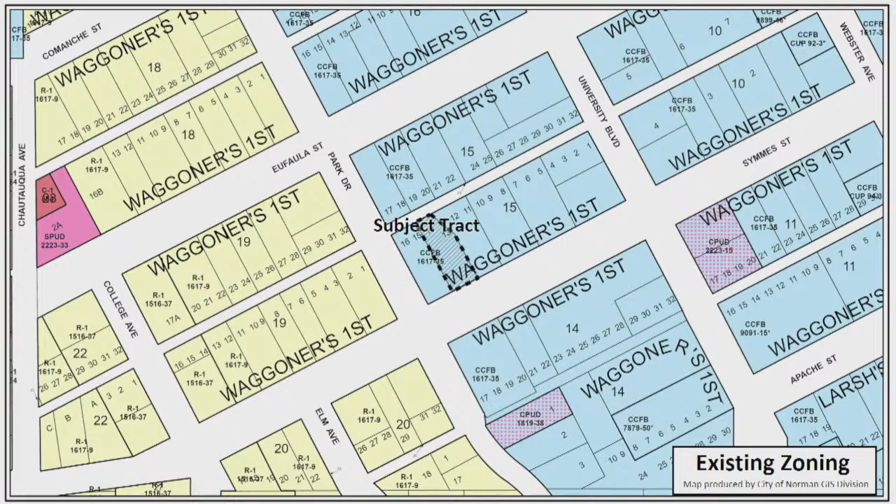And they're able to meet most of the requirements, except they will be extending a set of metal stairs on the east side of the building into the setback, and the finished floor elevation will be at grade. This is the existing zoning, which is Center City, and this is the existing land use, which you can see is surrounded by residential dwelling units. And here's an aerial of the property.

I would add that the proposal also will have the new building sitting at the 25-foot required build line as required in the CCFBC detached frontage.

The applicant was not required to have a pre-development meeting, but did choose to have one in order to allow the residents to find out about the redevelopment. There were 2 residents that came to the meeting. They had questions about bedroom quantities and dwelling unit quantities and the design of the structure, which the staff from Krittenbrink Architecture answered, and they had no further concerns.

The impact, let me show you. Here's the view of the existing structure. It is an existing triplex right now. And then here's looking to the east, down Symmes. And then here's looking towards the west, down Symmes. And then this is to the south, another residential dwelling. And here is the alleyway looking west and alleyway looking east.

As far as impacts, the previous rezoning requests for this vicinity have sought to maintain the residential single-family character of the neighborhood. In 2016, the residents of the neighborhood successfully petitioned to downzone from R2 to R1, and then in 2017, when the CCFBC was adopted, it was designated as detached frontage, which allows for either a single-family dwelling or a single-family dwelling with an accessory unit.

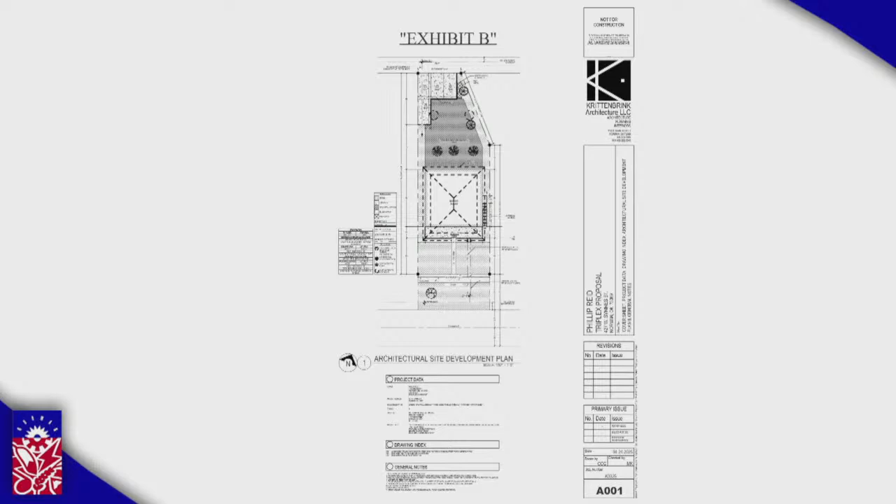I did ask because you went here on the back, and I will go through it now. I guess you can see what we have going on. So I press for... yeah, that one. It's never obvious. Okay, we went too far. Yeah, you went. Here we go. Okay, oh, so that's not my presentation then, is it? Well, oh yeah, keep going. Sorry, there you go. There we go.

So you can see right here, on the right is the 2-bedroom unit. It's fairly open plan, 2 bedrooms, 2 bathrooms. That rectangular area in the back is a common stair, used to get up to the upstairs. And then on the left-hand side, you see the 2 one-bedroom units. Again, there's that stair area. They have their own bathroom, own kitchen, washer and dryer and whatnot. And they enter from the front on Symmes for this property.

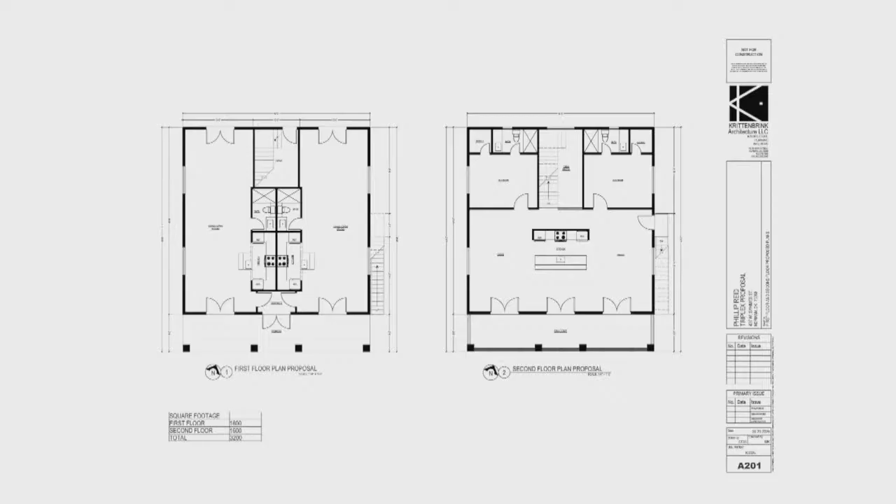However, the entry to get up on the back, we'll have 4 parking spaces along the back off the alley. You can see on the back there's an entry. This prompted a change from the owner, because if they're going to tailgate here, it's a great location. You see there's a porch on both sides - we're trying to create this very residential vibe. If we're down in front having a tailgate, we'd have to go all the way back around. So at the last minute we added an open steel stair, which code allows if we have a city official approve it. We ran it through Jeff, and he was okay with it.

That is the elevation. It'll be 2-story, again, with the front porch across the bottom. You have the unit on either side. The common entry in the front is in the middle, and then you see the second floor there. Tall ceilings, I think it'll be really nice - it kind of has a Tara meets Bourbon Street vibe to it. So I think it's a really nice unit. I think it'll be great. I live right across the alley from this, so this would be a welcome change for us and for the neighborhood. And I think that's it.

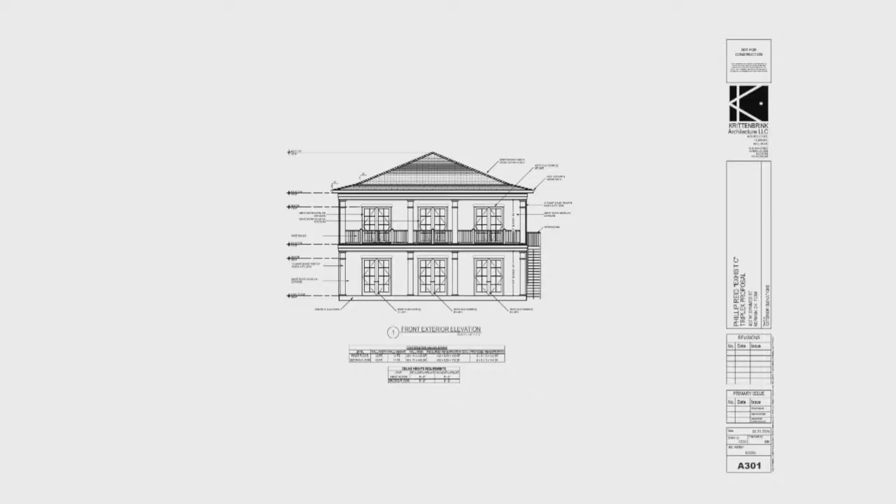I'd be happy to answer any questions.

Thank you. Any questions by commission for the applicant? All right, seeing none, are there any audience comments? Any planning commission discussion? Thank you.

Okay, if there's no other discussion, I would take a motion on this item. I'll move to approve. I'll second. And a vote. You may vote. All votes have been cast and it carries.

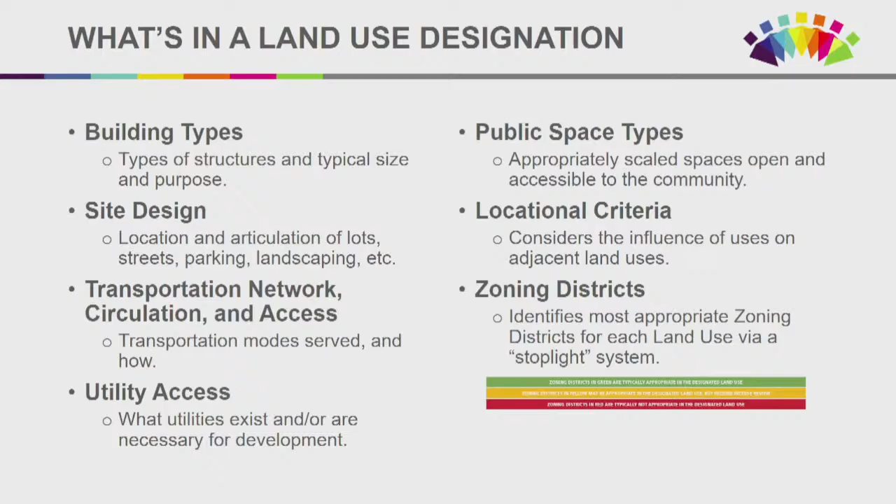When you look at each of the land use designations, one thing that's really important, especially for you as planning commission members, is understanding what each land use means. So there should be a page to 2-page spread on each one describing building types, site design considerations, transportation network and circulation access considerations, utility access, public space types, location, and even the potential zoning we have in place today. We hope that's a good tool for you to better understand what a land use means, like urban low versus urban medium, and so forth.

I want to take a minute to talk about the reserve area. The intent here is really preserving and protecting the area from harmful development, conserving existing portions of land for future urban densities. Within these areas, acreage subdivisions would compromise the feasibility of future urban services, so we're trying to keep this area in almost a static state. It is a bit different from the 2025 reserve—the boundary isn't exactly the same—but the urban reserve describes how development should be designed if anything would occur in that area. But again, we're trying to keep that from happening.

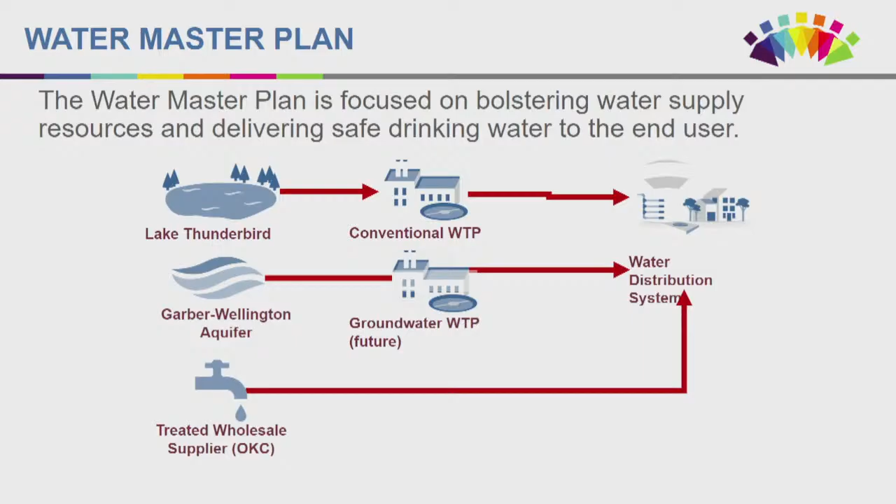The second bucket is the water distribution system—taking those supplies and delivering them through a series of pipelines, water towers, and infrastructure of that nature to deliver that product to the end user.

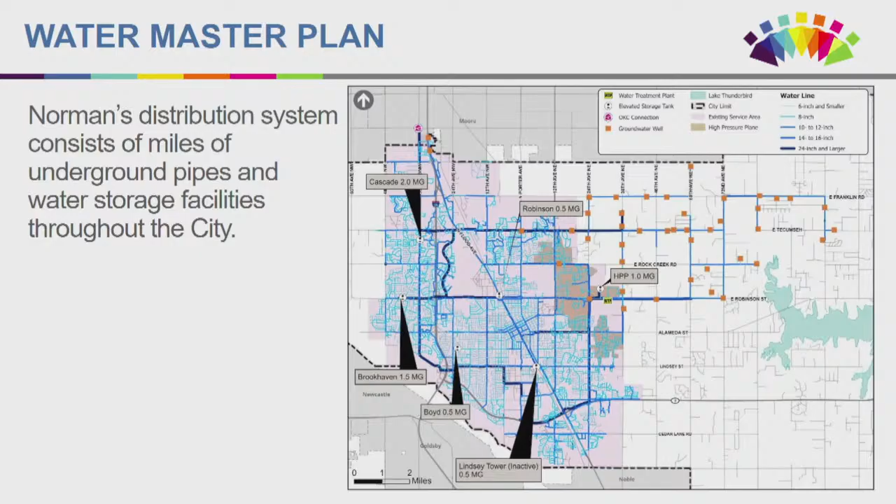Your Norman distribution system today consists of miles of underground pipes and water storage facilities throughout the city. So showing you a literal 30,000-foot view of what this looks like for our city, you can see the blue lines representing all the different distribution lines we have in the system, our water storage tanks throughout the system, and the orange dots representing our well field in the northern and northeastern portions of Norman.

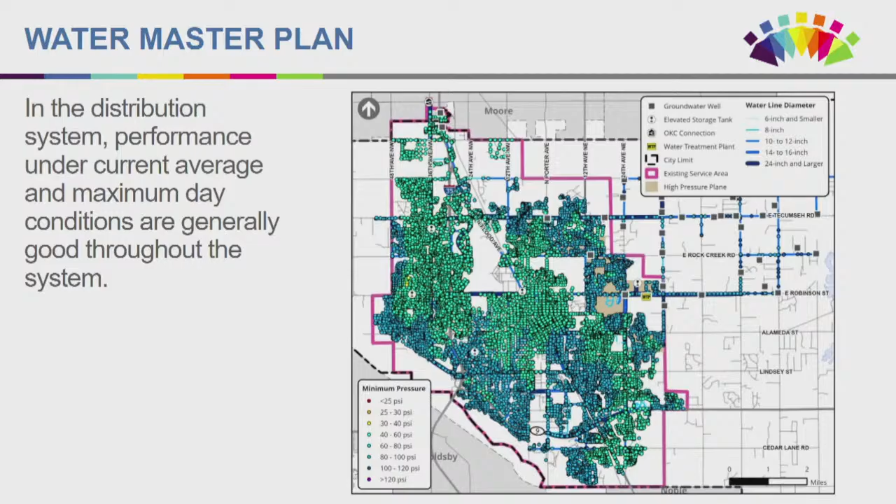In this graph, we don't want to see yellow or red nodes, and you can see here today under current conditions we have very limited instances of that throughout Norman. So a big focus of our plan is maintaining that performance over the next 20 years as we add demands and as we add growth throughout the system.

We go through a water demand procedure, and those water demands are projected to increase proportionally with our service population. Showing you a water demand curve on the screen, we have years across the horizontal axis, demand in million gallons per day on the left vertical axis, and our corresponding service population on the right-hand axis. The general trend historically in Norman has been relatively linear, and we're projecting a similar increase over our 20-year planning horizon, ending in 2045 with an average water day demand around 23 million gallons per day.

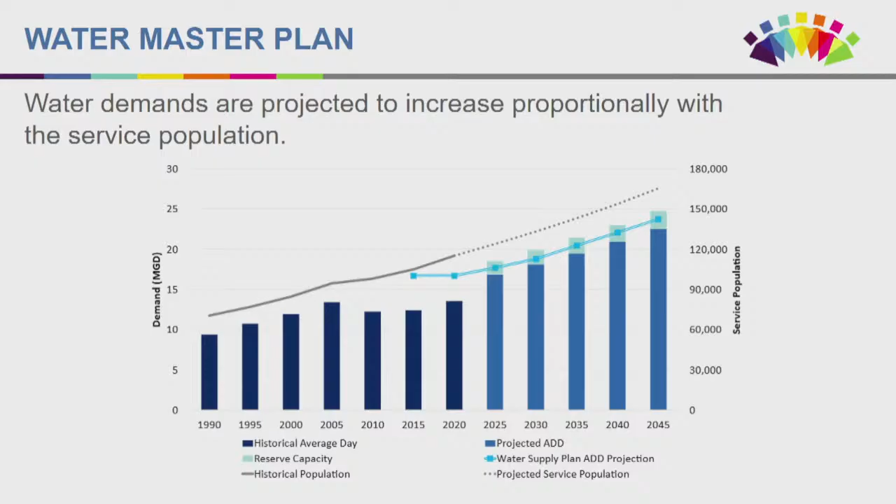Lake Thunderbird is currently the largest source of supply, currently supplying about 70% of our water demands throughout the system. Groundwater follows at about a quarter, 24% or so, with the wholesale OKC connection balancing the remaining 7%.

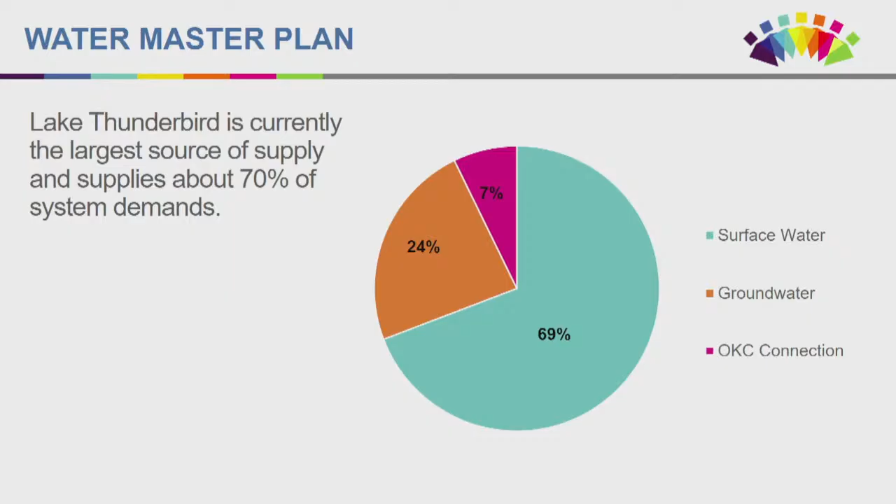This fluctuates from time to time as demands increase and decrease throughout the system, but on average, this is generally the split we have in our water supply portfolio.

Filling that gap was a big part of this master plan. We went through a robust alternatives evaluation, screened out many different alternatives that could potentially supply this water, and then developed 20-year life cycle costs for our shortlisted alternatives, which were deemed more feasible than the wholesale list of items we looked at.

Out of this exercise, those three alternatives shake out as the most cost effective over the next 20 years. When we put that together into a water supply portfolio in 20 years, you can see how that same pie chart we looked at a few moments ago changes over the next 20 years. We're looking to really expand our finished water purchase from the city of Oklahoma City, increasing those purchase volumes and potentially adding a second connection with OKC, continuing to add those Garber Wellington wells, growing that percentage of the pie chart from roughly 24% to 32%.

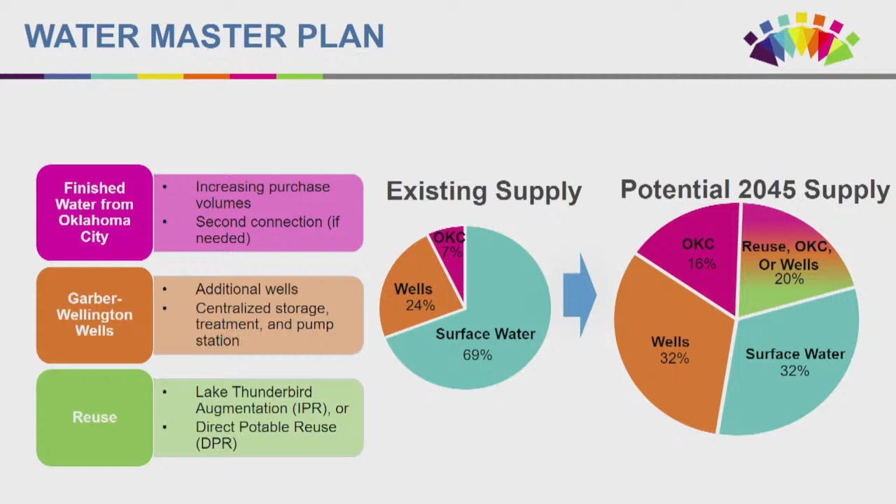Filling the balance with that potable reuse portion, IPR, Lake Thunderbird augmentation, our plan also discusses the potential for pivoting to direct potable reuse if necessary. That's a discussion in the report, with some considerations laid out, and it's allowed for in this plan if that becomes more feasible in the future.

When we put this all together in a 20-year CIP, or capital improvement plan, we're showing a map here with roughly 12 to 13 different key projects that come out of that CIP. These are focused on three primary areas.

One, bolstering our existing water service area, upsizing and maintaining it to meet those performance criteria we talked about. Then, in green, growing our infrastructure to serve future water service area improvements. And finally, the blue being the supply improvements, bolstering those water supplies that we then feed into the distribution system.

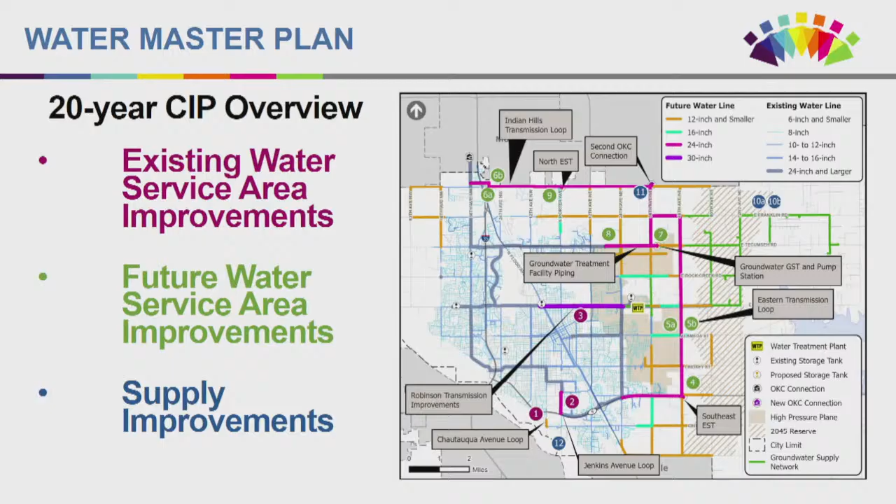And with that, I think I'm good to roll right into wastewater.

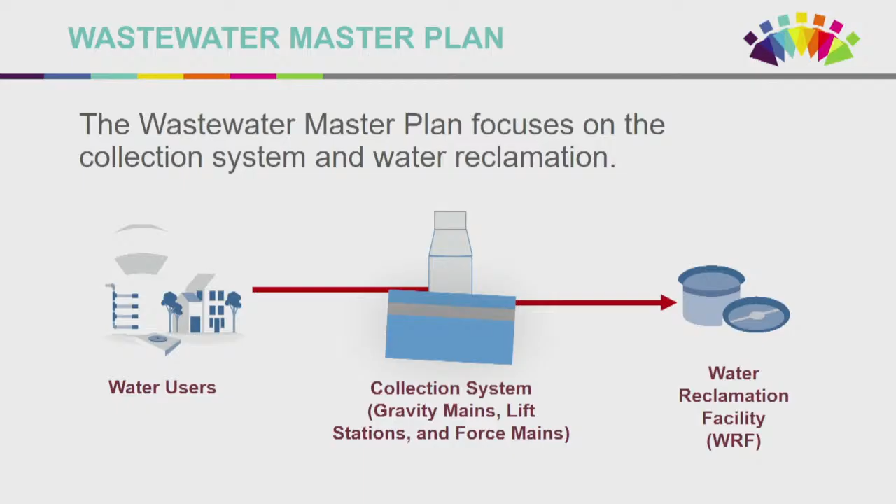So very similarly, kind of flip side of the coin here, our wastewater master plan focuses on two similar buckets: the collection system and water reclamation. The collection system being the pipelines, manholes, lift stations that collect wastewater and convey it to a single common location, where we reclaim that wastewater and treat it at the water reclamation facility before it's discharged back to the environment or reused for other beneficial uses.

Giving you a snapshot here of Norman's wastewater system, that collection system is miles and miles of gravity pipelines, force mains, and lift stations that all convey to a single water reclamation facility on the south side of town. You can see there in the purple triangle on the southern end of town off of Jenkins.

You'll hear about drainage a bit more later tonight, but as some of you may be aware, there's a general watershed boundary running through the center of Norman, shown in that blue line. Generally speaking, everything on the south side of that line drains to the Canadian River. Everything on the north side generally drains to Little River, Rock Creek, etc., eventually to Lake Thunderbird. That's a big part of our evaluation: optimizing those sewer sheds, conveying that flow cost-effectively to those common locations for water reclamation.

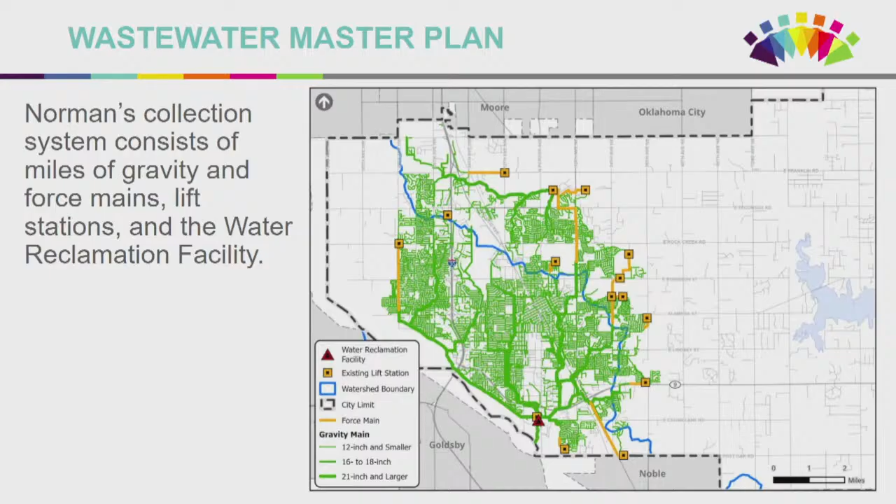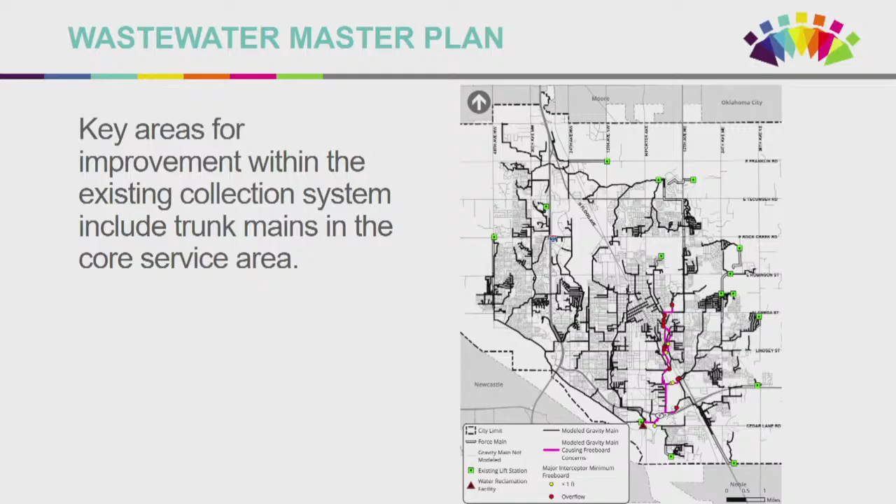Key areas for improvement within this existing collection system mainly include things like core trunk mains in our core service area. As we continue to add more demands throughout the system, those demands consolidate in the core arterial lines within our system. As an example, Bishop Creek, Imhoff Creek, as we get to the southern portions of Norman, that's where we consolidate a lot of our wastewater demand. So keeping up those interceptors, upsizing those lines and that infrastructure to keep up with that demand is a big part of our master plan.

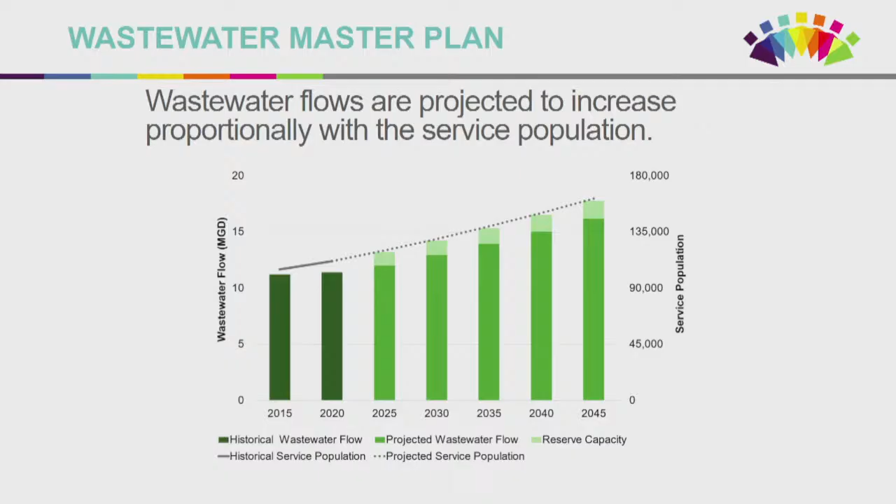Showing you a similar demand curve as the water side, our wastewater flows increase proportionally to that service population. Wastewater flow in million gallons per day on the vertical axis, you can see roughly a linear trend over the next 20 years, ending at roughly 17 MGD of average wastewater demand in the future, or in 2045.

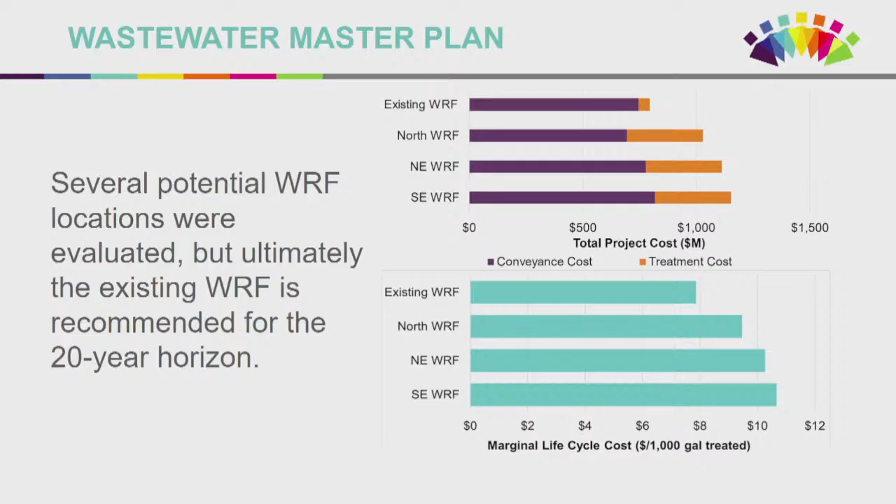A big piece of this is identifying if we continue to build out our existing water reclamation facility or if we consider building additional reclamation facilities. We considered several potential locations for new WRFs, but ultimately that existing WRF we have today is recommended for the 20-year horizon. Simply put, the economy of scale, managing the asset we already have, expanding that infrastructure is much more cost-effective over the next 20 years. You can see in the plan that's detailed as the recommendation for the next 20 years.

As we look at the 20-year capital improvement plan for wastewater, we have a series of improvements targeted at bolstering that existing wastewater service area. Future eastern conveyance improvements, as more demand is placed on the eastern side of Norman, 48th Avenue, locations like that, infrastructure to service those areas is a big component of this plan, again consolidating that flow to the existing WRF. And finally, existing WRF improvements, as we place more demand on that infrastructure, the improvements to keep up with that demand are detailed in the plan.

One thing that applies to both water and wastewater that I think is important to point out is our plan is based on demand triggers. This 20-year CIP for both water and wastewater is built so that you make improvements as the demand necessitates it. If our projection is turning out to be more conservative than what the actual growth is realizing, these improvements can be delayed until those demands reach a certain trigger and the infrastructure is actually needed. This plan is set up to be flexible so that Norman Utilities can react to the demand they're seeing in the system as it occurs, not just based on a projection. So there's a bit of check and balance as far as when the infrastructure spending has to occur.

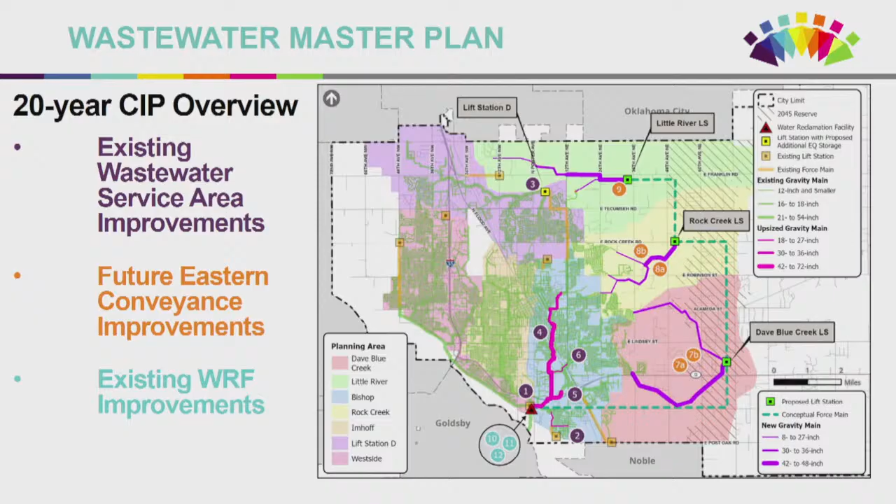That's all I have for you. Thank you.

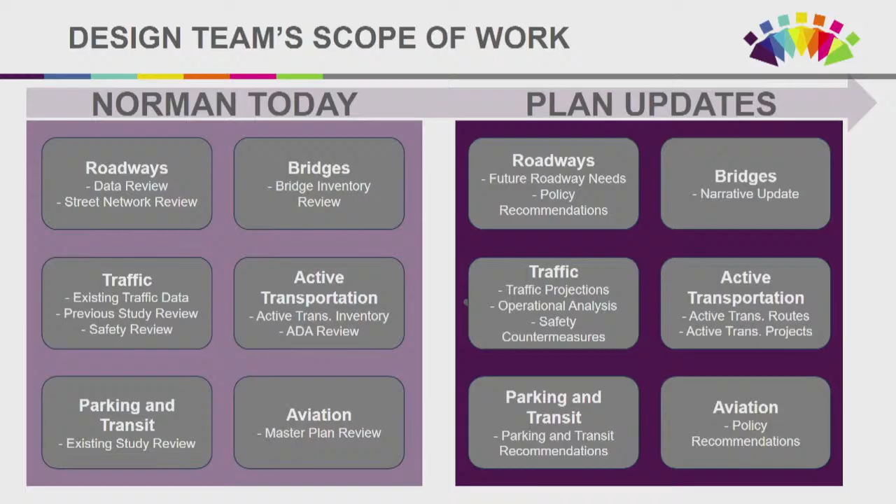Something that was unique to this is we also got the opportunity to add active transportation, parking and transit, and aviation, and include those master plans into the overall transportation master plan update.

So we did look at several existing studies. Obviously the 2014 comprehensive plan is where we started. We also looked at ACOG, the Association of Central Oklahoma Governments' Encompass 2045 plan, taking their guidance and making sure our recommendations mirrored theirs as well.

The 2021 Go Norman Transit Plan, which has recently been adopted and has been in use for a few years now, and the RTA, Regional Transit Authority, and their commuter rail plan between Edmond, Oklahoma City, and Norman. We looked at that as well and incorporated some of those concepts into our plan.

And then the Westheimer Airport Master Plan. This one's a little unique because the University of Oklahoma owns the airport, so it's their master plan and they're the ones responsible for implementing it. However, anything outside of that is what we looked at with the transportation master plan update.

So we did do several workshops, as Amy mentioned earlier, and I think the two biggest things we took away from public input here are safety - and it doesn't always mean vehicular safety, but more pedestrian safety than anything - and active transportation, trails, sidewalks, things of that nature. Those were probably the two biggest takeaways from the public meetings, and that helped guide the subcommittee as we moved forward during the update.

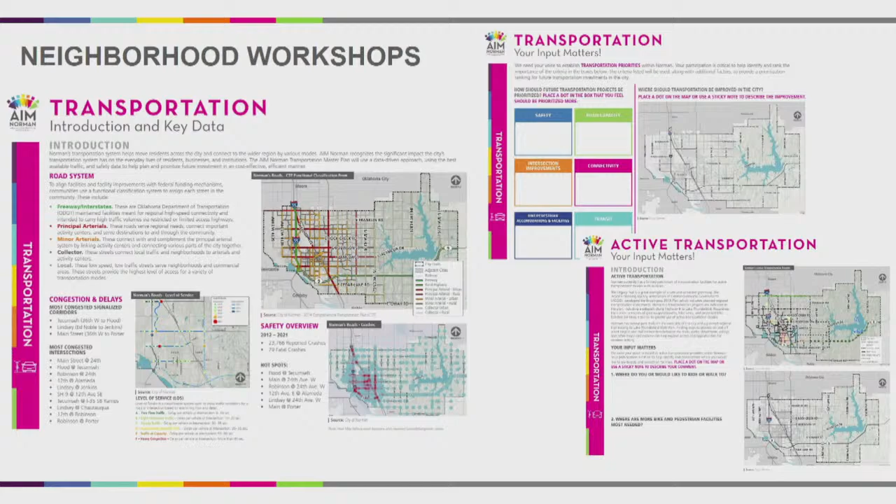That vertical distance above. There has been a state law that was enacted, but it is one that the city council will still need to adopt resolutions for, or a policy for that.

We want to make sure we provide more transit opportunities and active transportation to that. If you start looking at the Aviation Academy that's going to be built out there, how are we going to get students to that facility? Whether it's through additional bus routes, trails, sidewalks, or streets, we want to make sure we focus on that. And then we want to make sure we keep the infrastructure going out from the airport to the highways in good working order, such as Robinson Street, Flood, and Tecumseh, so they can connect to I-35 as well.

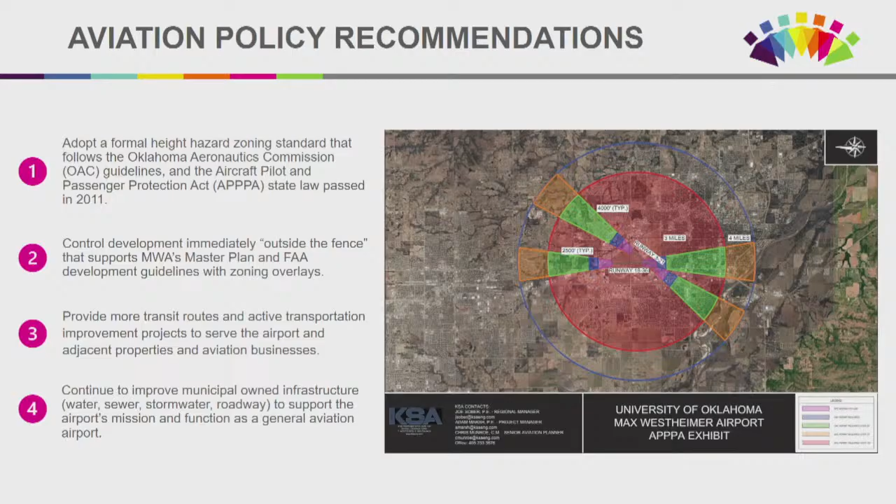The parking recommendation is from a study done by Kimley-Horn back in 2018, a joint effort between the county and the city on how to address parking, specifically in downtown Norman. That plan has been adopted by the city in the past. We didn't see any reason to change any of that, so we want to continue to push that forward, but we also want to work closely with the University of Oklahoma on any future developments, particularly pertaining to the Campus Corner area. We want to look at parking enforcement, new technology on how to meter those parking spaces, and make sure we work with the county going forward on who's going to manage all of that infrastructure.

The transit plan is also very recent. Some things have been implemented since that point in time, one of the biggest being the transfer center downtown. We want to make sure we start connecting some of those other regional transit opportunities, let's say the RTA stop at the depot. We want to have trails and sidewalks, active transportation between there and the transit facility, and start connecting those with the parking facilities downtown so they all integrate together. This is a document that's updated annually and looked at with bus routes, so we want to continue to support that as we go forward with the 2045 plan.

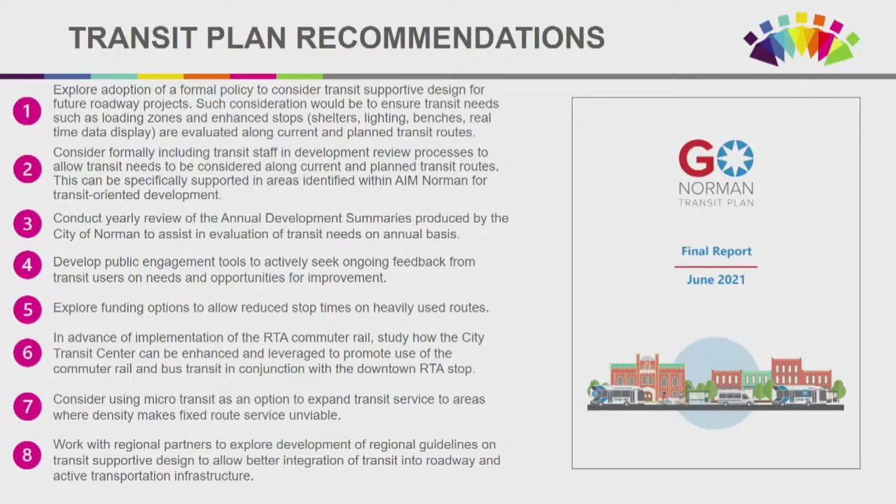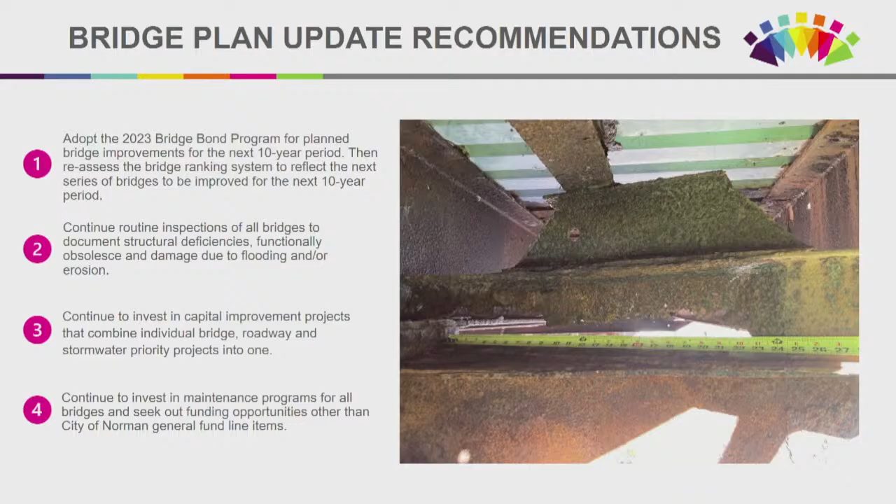The bridge plan is something we adopted as the 2023 bridge bond program. It has just recently been implemented, and we saw no need to change that. Staff did a wonderful job identifying all of the bridges in the city of Norman, nearly 90 structures. The picture you see here is 60th Avenue Northeast. That bridge was one of the very first on the bridge bond program to be designed and constructed, and it was just opened last week. So we want to continue to reinforce our routine inspections, update that staff list of priority projects going forward. Those bridges are inspected every two years on a cycle throughout the city, so we want to continue that program and move it forward. I think we will see great success with that in the very near future.

Traffic - when we think traffic, we think about congestion and we also think about safety. The traffic recommendation here is to implement and utilize the regional safety action plan that ACOG has developed for the area, continue to research and chase after grants to fund things like Safe Routes to School, which is one of the bigger policy adoptions we're going to recommend the City of Norman continue to follow. And then develop a roundabout policy for intersection improvements. One of the tasks we were asked to do with the transportation plan update is provide city staff with a tool, a spreadsheet that analyzes intersections from a conventional four-way intersection into how that would look as a roundabout and how it would function. That gives city staff a better tool moving forward on whether they want a signalized intersection or a roundabout as a more safe and cost-effective solution for intersection improvements.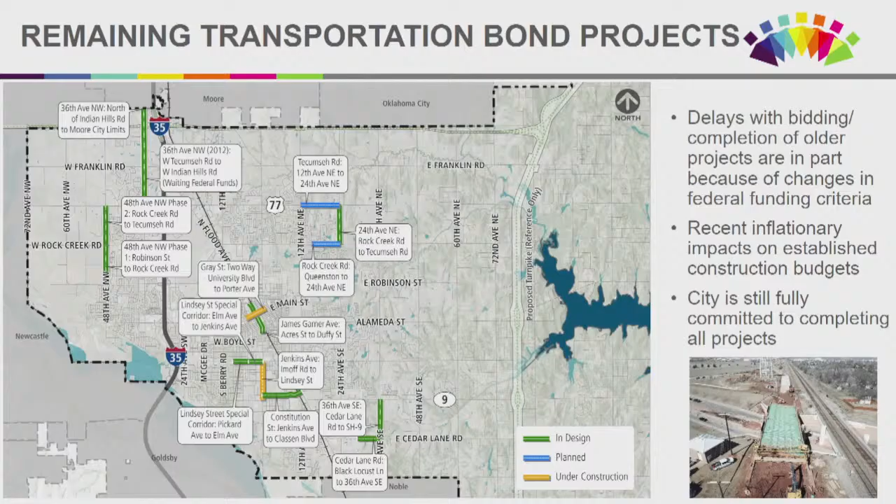Transportation obviously goes hand in hand with the land use plan. We need to make sure we are connecting those developments with safe routes, whether they be roadways, active transportation, trails, greenways, things of that nature. So we wanted to make sure we worked hand in hand with the land use plan to make sure our transportation plan dovetailed nicely with that.

Active transportation, again, this was the number one thing we heard from the public: we need more active transportation, we need safe active transportation. We say that active transportation could be an on-street bike path or bike lane, sidewalks, side paths, or green belts used for active transportation and recreation.

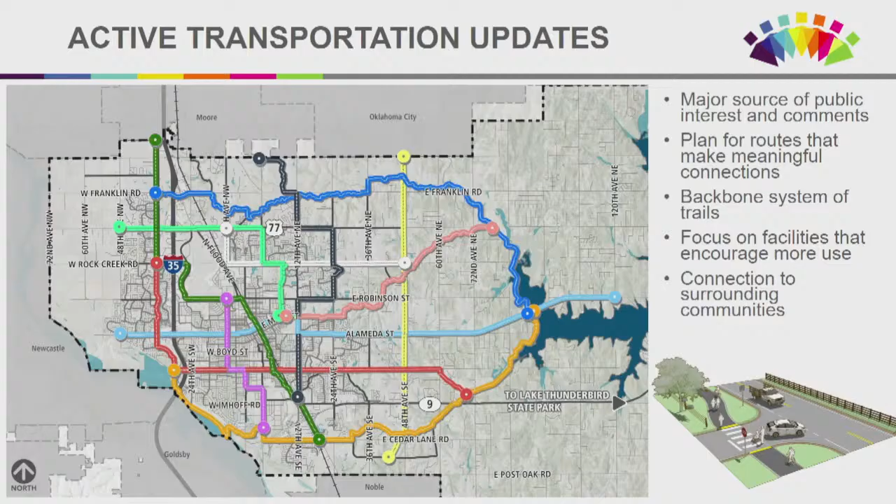The other one you see here, and we'll talk more about it in the next slide or two, is East Alameda Street, being able to go from downtown Norman or the university safely by bike or on foot out to one of Norman's biggest recreational assets, Lake Thunderbird. There's already a trail system being implemented along Highway 9, but that's a high-speed facility with a lot of traffic. Alameda has lower speeds and less traffic, much safer for pedestrians moving forward.

We also did a roadway plan update, which supports the land use but really addresses safety. It's consistent with the ACOG Regional Transportation Plan, the 2045 plan, and it incorporates input from the public about problem spots, whether congestion or unsafe intersections with high accident rates.

One of the other big things the subcommittee worked on, and I was very pleased with their direction, is a special use corridor for East Alameda. I mentioned the trail system earlier. Think of East Alameda with Highway 9 to the south, a high-speed facility, and potential turnpikes to the north, another high-speed facility, both unsafe for pedestrians. East Norman needs a safe, pedestrian-friendly, slower, lower-volume roadway to get to downtown and the east side of town.

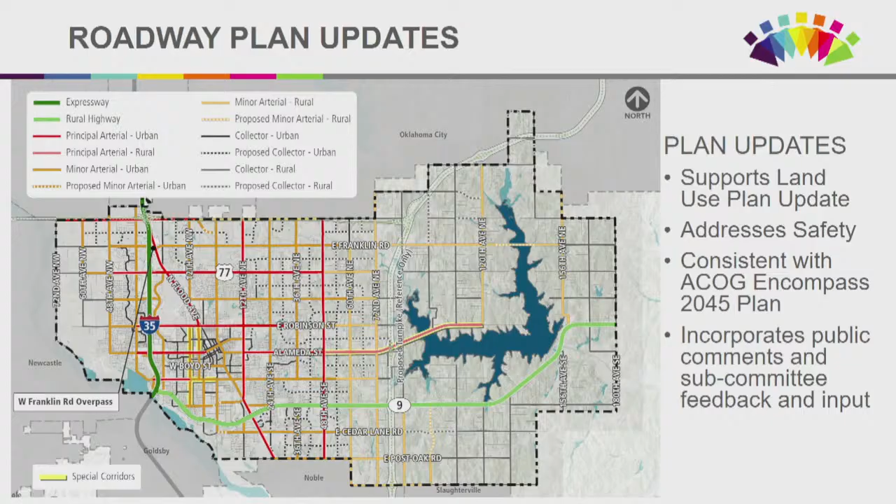We also suggest improving the intersections at the rural areas, since those are stop-controlled for north-south traffic while Alameda has full right-of-way through those intersections. Roundabouts may be an opportunity there to help slow down traffic and make safer intersection improvements going forward.

There are some lanes added for capacity in the plan going forward, but that will be driven, much like Cole said, by demand over time. As that demand develops, the road network improvements will be implemented right along with it.

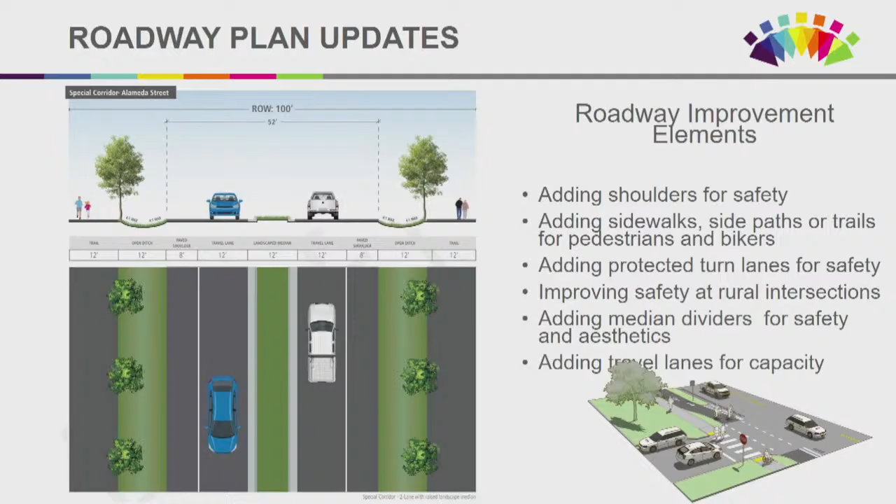Another challenge was getting active transportation across I-35 on the north side of town. ODOT, working with their planning folks, has identified a new overpass at Franklin Road in the future. When that happens, it will allow us to have an active transportation trail across the interstate on the north end of town. We already have that at Rock Creek, and also at Lindsey Street.

So this would be kind of that north end of the active transportation plan. We mentioned East Alameda, and then we also mentioned 48th Avenue East. As development moves out that way, ACOG had already identified 48th Avenue East as being a major north-south corridor for East Norman.

It had stopped at Franklin Road. We want to take it all the way up to Indian Hills, and then we also want to extend it south to the south boundary of Norman. So now that becomes a potential principal arterial for north-south traffic for folks on the east side of town that don't have to go all the way over to Flood, don't have to go all the way to Porter, don't have to go all the way over to I-35.

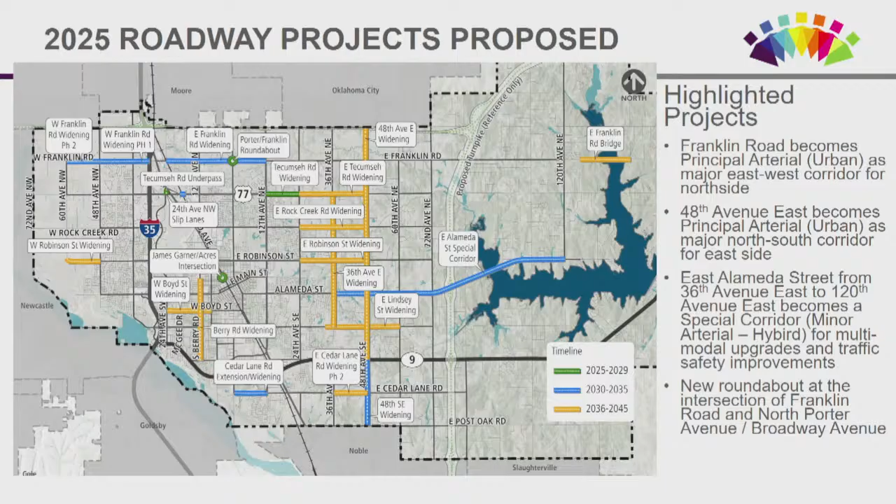Now there was a comment made, we do show the turnpikes as they are shown today on Access Oklahoma's website. This was a decision made by the subcommittee and voted on by the subcommittee. It's not that we support the turnpikes, and even in our document we talk about, this is Norman's transportation plan. It's not anything to do with or response to the Turnpike Authority and their future plans. But we felt remiss if we didn't at least show that on our plans going forward. Again, as their plans change, this is a living, breathing document that can be updated at any point in time going forward with that.

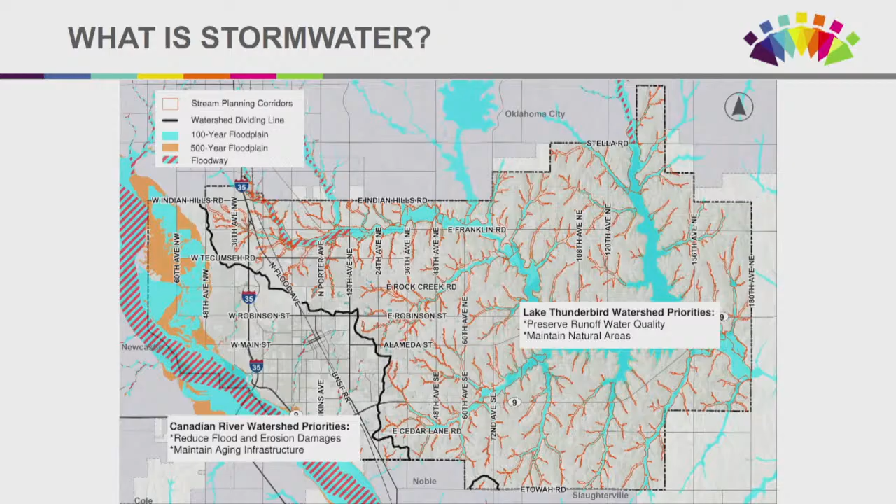So in the Lake Thunderbird watershed, you have runoff water quality preservation as the big priority, as well as maintaining our natural areas. We're going to get into what all these orange lines on the screen are in a little bit, but that's really important to preserve those natural areas. And in the Canadian River watershed, reducing those flood and erosion damages that are constantly occurring due to impervious area and just constrained and aging infrastructure. So maintaining that aging infrastructure in the Canadian River is extremely important.

And so that was something that we really focused on throughout this, and that was really based on input from our citizens. So during those neighborhood workshops, we discovered that the citizens' priority in Norman for stormwater is really primarily on ecological improvement and public safety.

When you start talking to people about public safety, it's really about that stormwater quality, especially as it moves towards Lake Thunderbird. So we really wanted to put a big emphasis on what policies we can implement that have been recommended in the past, or new policies that will prioritize stormwater quality.

We all know that on weeks like this we can see the flooding issues and erosion issues that we have, but also making sure that stormwater quality is a focus as well. So this is an update, kind of like what Brett mentioned.

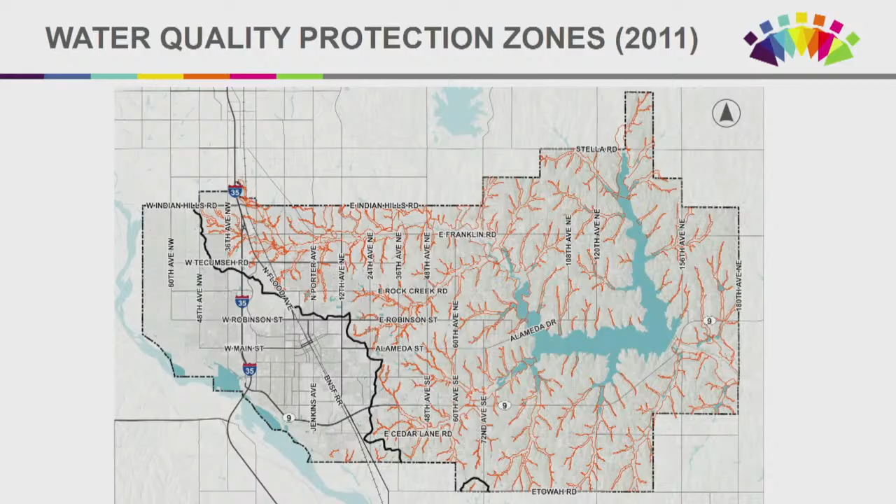In 2011, City Council adopted the Water Quality Protection Zone Ordinance. Now, as properties are platted, these stream planning corridors are converted to a water quality protection zone, which maintains that natural riparian zone that helps filter water as it moves towards Lake Thunderbird. It helps preserve those natural areas and is a huge part of addressing the priorities of the Lake Thunderbird watershed. We want to make sure that's emphasized and maintained moving forward, and even bolstered up a little bit. We'll get to that in a bit.

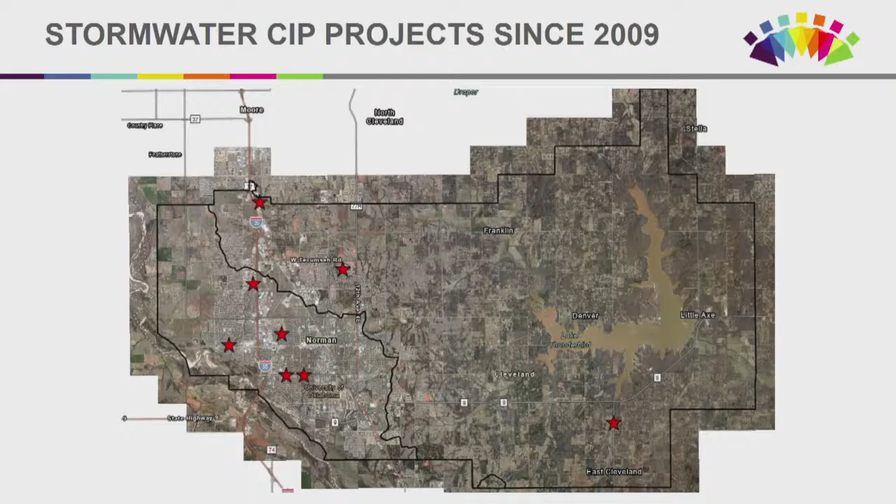We also wanted to emphasize that there have been several capital projects addressed since 2009. Those stars on the map represent projects identified in 2009 that have been completed. The biggest one people remember is Lake McGee. If you've been here a long time, you remember floodwaters would just pond there and stay for several days. The capital projects list developed in 2009 identified this one, and it was constructed several years ago. Just wanted to highlight that success story.

Another thing that happened in 2023 is updating the engineering design criteria. This implemented several stormwater updates, bringing the stormwater design criteria up to modern day, moving out of the 1980s criteria into something representing current science with precipitation estimates and things like that. We also recommend this be looked at again every couple of years to make sure the design criteria keeps up with science.

Another thing added, in 2003, was section 7000 of the engineering design criteria, which focuses on sustainable stormwater development and design - focusing on stormwater quality, maintaining stormwater quality throughout the city. There has also been a major focus on cooperation and education of stormwater.

Michelle Loudenbach's team, the Doers, have done 116 events from 2021 to 2025 to educate the public on what stormwater is, really helping people understand that it's not just every time it rains, it floods. It's also about stormwater quality throughout our city and how important that is.

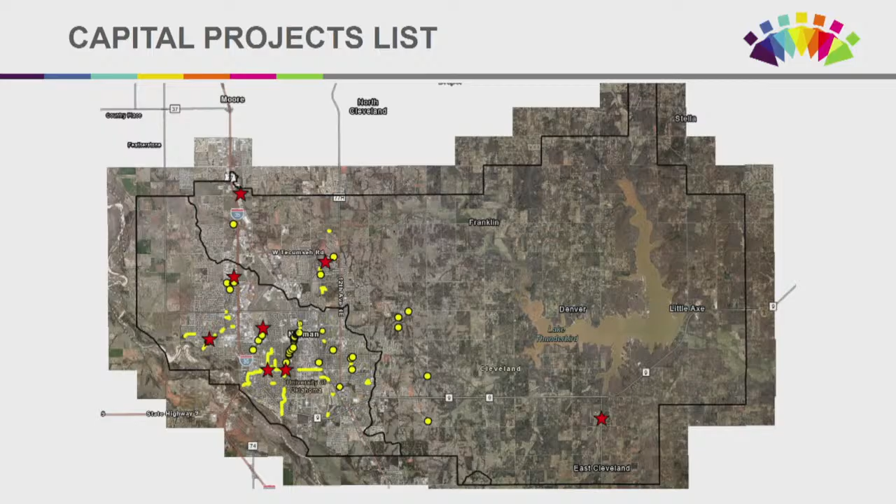The stormwater team has done a really great job addressing what they can with the budget they have. But there really does need to be a focus on finding alternative funding, whether that's a stormwater utility or a general obligation bond for stormwater specifically. And also, like Brett mentioned, adding stormwater improvements to other projects throughout the city, whether that's transportation projects, parks, or the bridges that are going on now with the bridge bond. That's a really important source of alternative funding as well.

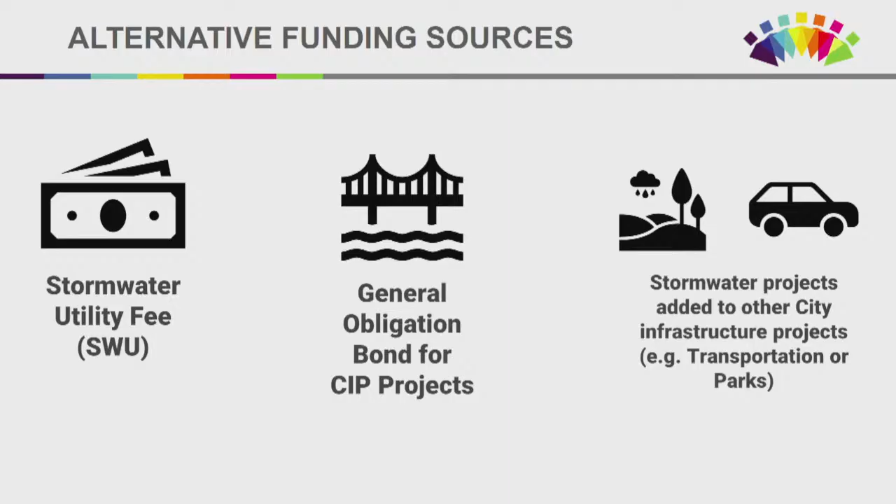Now we'll move into what is left to do in 2025, or what is new for 2025. We did update the goals for the Stormwater Master Plan. I'll run through these a little bit. The first goal was focused on water quality: protect the runoff water quality contributing to Lake Thunderbird and the Canadian River to preserve the natural and beneficial uses of these water bodies.

Moving on to flood risk: providing an understanding of the flood risk to citizens in our community and continuing to implement and enhance the capital improvement program to help reduce flooding risks. Something I should have mentioned is we took that capital improvement plan, all the projects identified in 2009 that had not been completed yet, and updated the cost estimate based on inflation over the past few years, as well as new understanding of what it will take to construct those projects. We also reevaluated the evaluation criteria matrix for those projects and made it something more objective that can be evaluated based on GIS processes. We really want that capital improvements program to be useful for the city in prioritizing those projects, and that addresses the flood risk in the center part of town.

Also, moving on to ecology: enhancing and preserving the ecological character of the unurbanized areas of Norman. That goes back to the water quality protection zones and the stream planning corridors. Same thing with riparian areas: restoring or rehabilitating the riparian areas in the urbanized area of Norman while expanding recreational access and opportunities that support the ecological health of these areas. This involves working with the parks plan to make sure parks are located in places where you can provide some of that floodplain storage—a dual purpose park and stormwater facility.

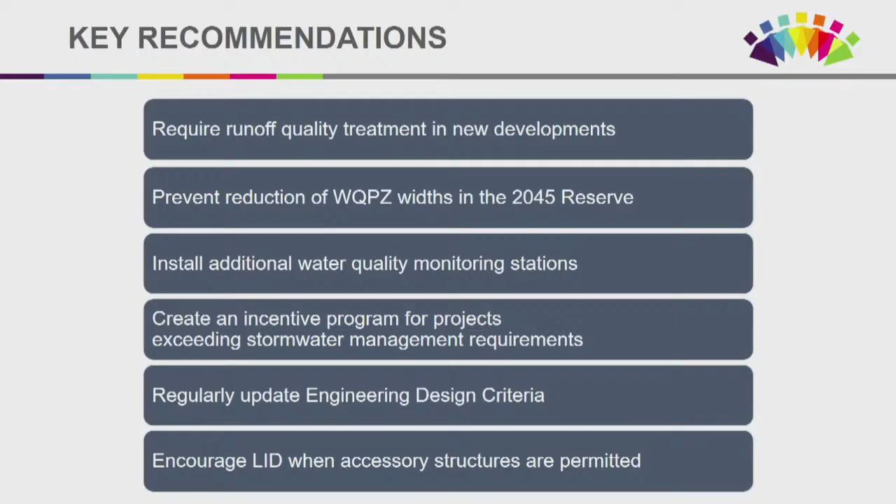Going back to the stormwater quality treatment recommendation, this is what we developed for the city. There are basically three zones of levels or volumes of water quality treatment required. Zone 1 would be the most intensive, treating the first 1.5 inches of rainfall. That volume is calculated based on the first 1.5 inches, within the 2045 reserve and east. As we move closer to Lake Thunderbird, we require more treatment, which also moves up into the major tributaries to Lake Thunderbird.

We have Little River on the north part of town, Rock Creek, and Dave Blue Creek down at the bottom and its tributary. We have a 1,000-foot buffer from each of those streams where that 1.5 inches would be required. Then another 1,000-foot buffer off of that would be Zone 2, where 1 inch of water quality volume treatment is required for discharges into that area. And in Zone 3, which is the rest of Norman, just half an inch of water quality treatment.

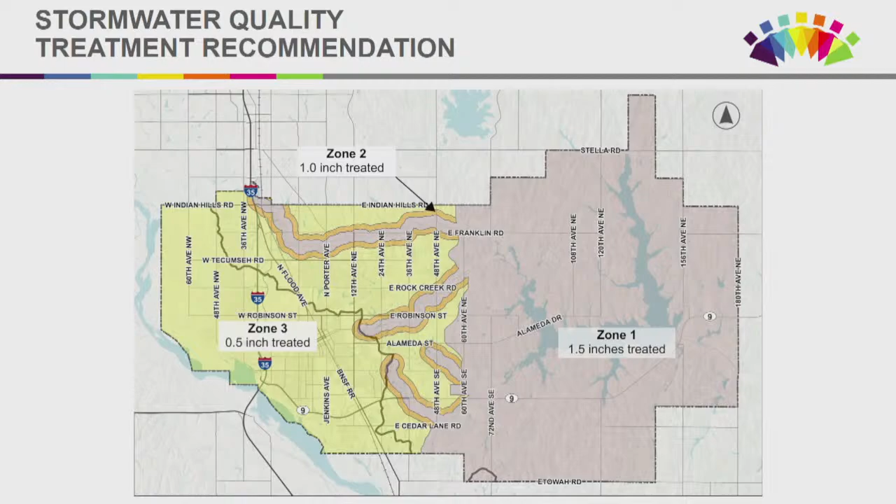This would be a brand new requirement for Norman, and we want to not make it too onerous to develop, since we need more development in areas identified as future low urban or medium urban throughout the east part of Norman. But we're requiring some amount of water quality treatment, making it more intensive as you move closer to those streams that impact the lake more directly. So that's our new recommendations that have gone into this Stormwater Master Plan update.

We've already gone through water and wastewater, so we'll go on to parks. I appreciate your guys' attention today.

Oops, there we go. Thanks. Okay, sorry, you got me back.

I would say that if you've seen Molly present this from RDG, who helped lead this, she has a lot more energy—maybe that's what she needed right now. But this is the last one, and we'll move through this quickly. But you saved the best for last, right? Parks are always the best part of our communities frequently.

Big shout out again to the subcommittee that worked on this, and to our subcommittee chair who helped navigate this process. Really appreciated all their help and input.

Features of the parks plan include a recreation program analysis, facility analysis, marketing and branding—actually ended up getting pulled into this a little bit too—goal setting, and finding synergies with other planning efforts, developing our long-term plan out of all of these pieces.

I don't think this was envisioned at the beginning of the process, but as the group worked together, they realized refining the department's mission statement was a good idea. Through several meetings and conversations, they arrived at a new mission statement: our mission is to provide the community of Norman with safe, inclusive, and accessible parks, recreation, and cultural experiences that enhance the quality of life for residents of all ages.

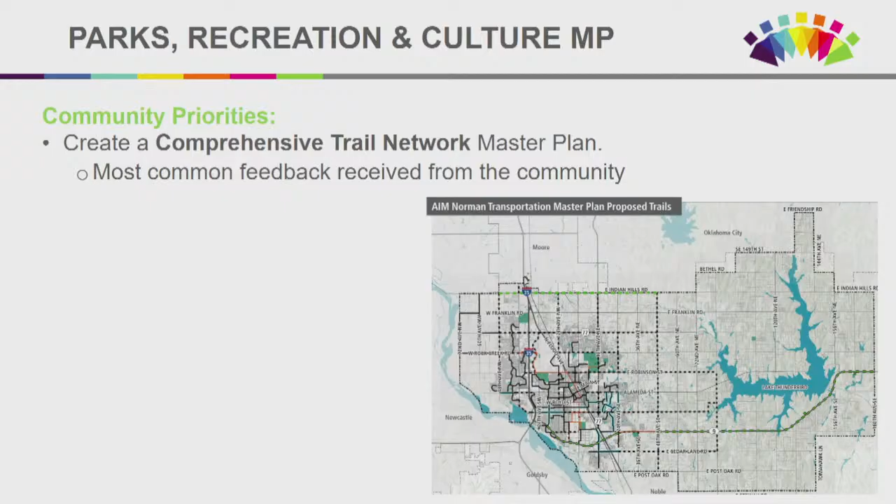It frequently came up. With regards to prioritizing our outstanding goals, some things that were specifically highlighted were more splash and spray grounds, building a new recreation center, Ruby Grant Park as a possible site, rebuilding or renovating and expanding the 12th Avenue Recreation Center, rebuild or renovate or expand the Little Axe Community Center, developing a community park in the southwest portion of Norman, and then finally continuing planned upgrades in Griffin, Reeves, and Westwood Park.

So those were some of the priorities from the previous master plan that folks felt needed to be carried forward. On updating and modernizing policies, a few here to note: the park development fee, which was last updated in 1994.

I think I joked that we have employees that were born after that. I know we do. Changing the cost structure for the park development fee from a flat fee to a cost per square foot model. Reviewing and revising the parkland dedication ordinance, which was last updated in 1976.

And then exploring and implementing our commercial development impact fee to support beautification and trail maintenance, and finally analyzing and reclassifying as needed parks in Norman's park system.

With regards to the community priority for that well-rounded, diverse array of programs, potential areas for programming that were identified for growth, at least in some of those programs: adult programs and fitness, outdoor recreation and environmental education, community gardens and kind of unprogrammed spaces, additional special and community events, teen and tween programs, affordable childcare, outdoor adventure and family programs, and finally, adaptive programs.